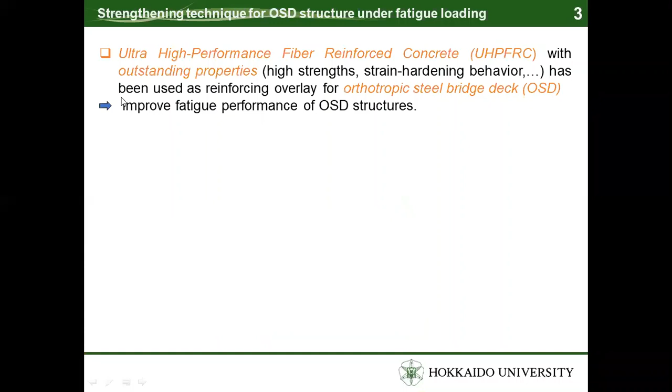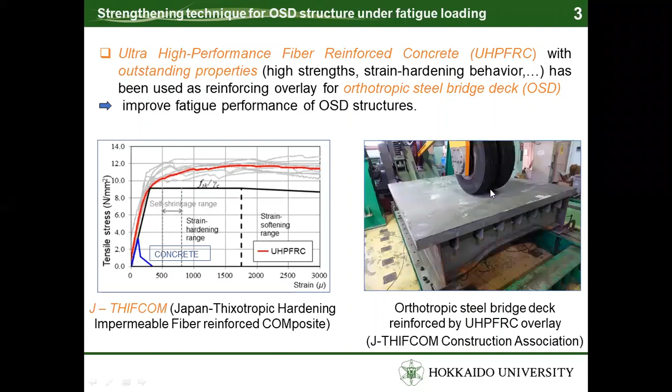Introduction: ultra-high performance fiber reinforced concrete (UHPFRC), with outstanding properties such as high strength and strain-hardening behavior, has been used as a reinforcing overlay for orthotropic steel bridge decks to improve the fatigue performance of this kind of structure.

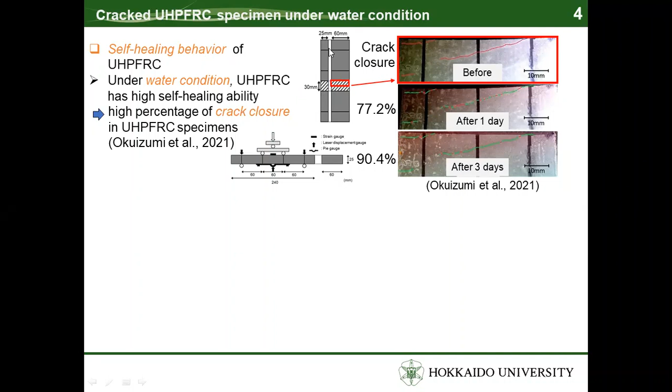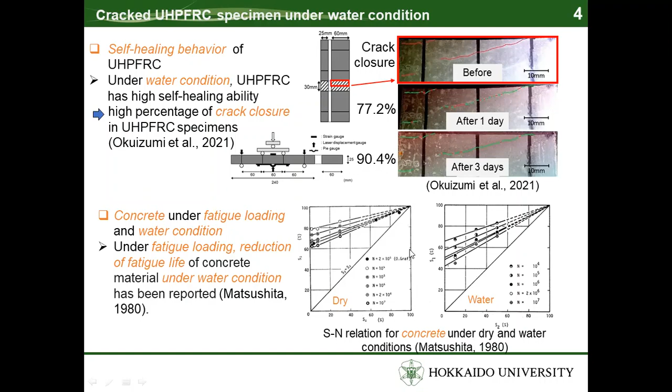The objective of this research is to develop analytical models based on the finite element method to investigate the fatigue behavior of UHPFRC-steel composite decks subjected to moving wheel loading under surface water conditions. The self-healing behavior and reductions of fatigue life are considered in the material model of cracked UHPFRC. The analysis will be verified with experiments from the J-THIFCOM Construction Association.

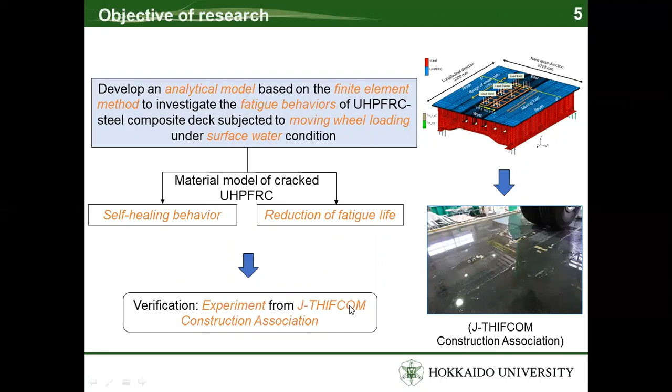Material model of UHPFRC. After the first stage under dry conditions, water has been supplied on the top surface of UHPFRC for one night before stage 2.

Assumed phases for the material model of UHPFRC: the first phase is the self-healing of cracked UHPFRC for one night under surface water conditions. The second phase is a higher degradation speed of cracked UHPFRC under combined action of fatigue wheel loading and surface water conditions.

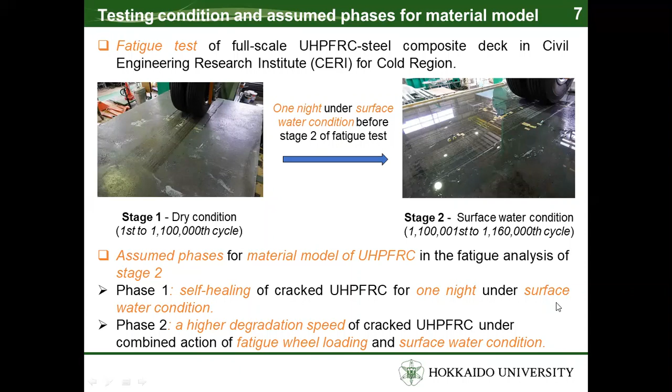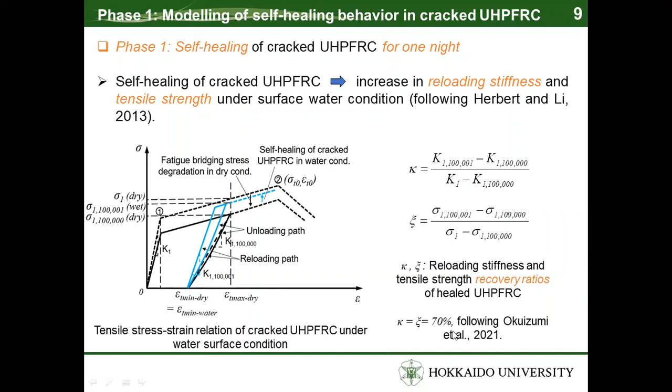In the first phase of the material model, the self-healing of cracked UHPFRC in terms of increasing reloading stiffness and tensile strength under surface water conditions is considered, and the recovery ratio is chosen as 70% in this analysis, following the results of Okuizumi et al.

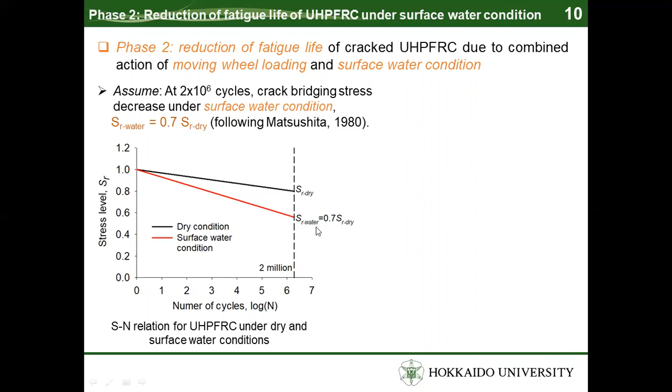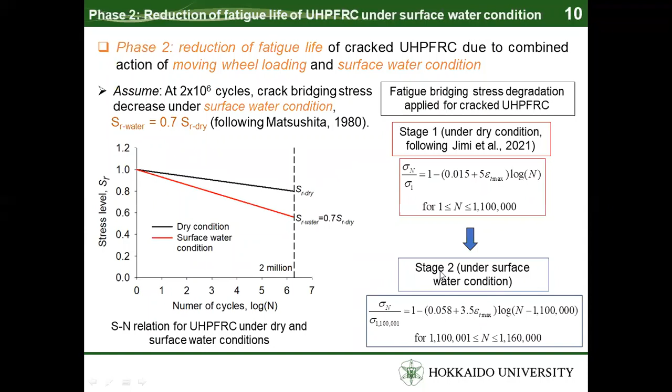For the second phase of the material model, it is assumed that at 2 million cycles, crack bridging stress decreases under surface water conditions, and the stress level in water conditions is chosen as 70% of that from dry conditions. The bridging stress degradation applied for cracked UHPFRC under surface water conditions in stage 2 can be calculated and is shown in these equations.

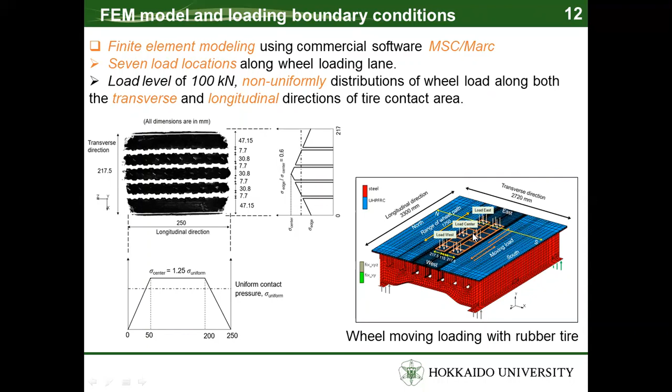Seven load locations are assigned along the wheel loading lane with a load level of 100 kN. The non-uniform distribution of wheel loads along the transverse and longitudinal directions is assigned for the tire contact area.

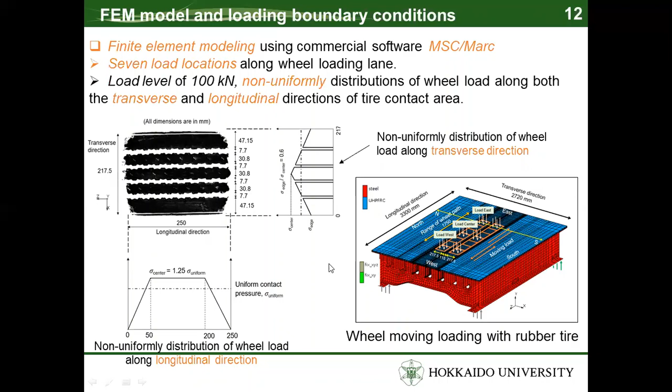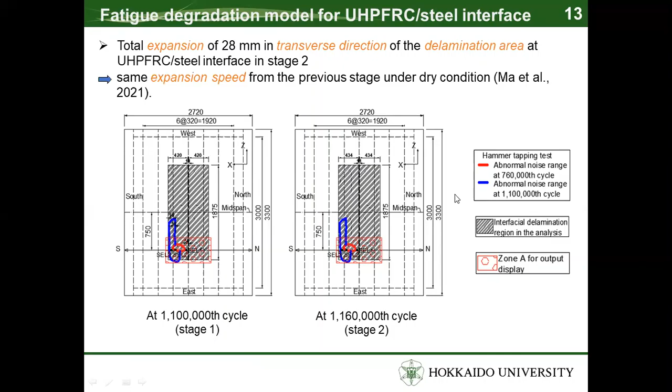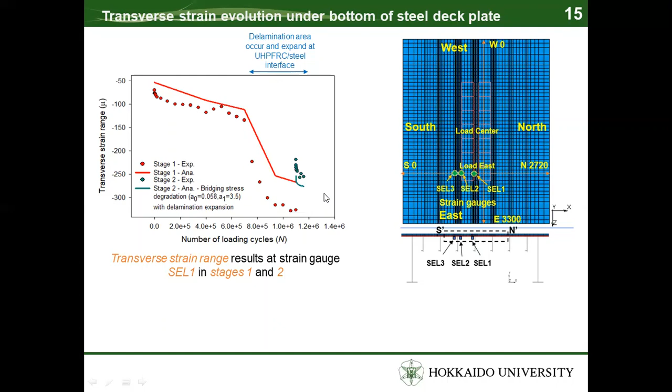After that, in stage 2, under surface water conditions, due to the recovery in reloading stiffness and tensile strength caused by the self-healing of cracked UHPFRC, a decrease in strain range level could be observed from the beginning of this stage. After that, under moving wheel loading, due to the fatigue life reductions of UHPFRC, an increase in transverse strain range level could be obtained.

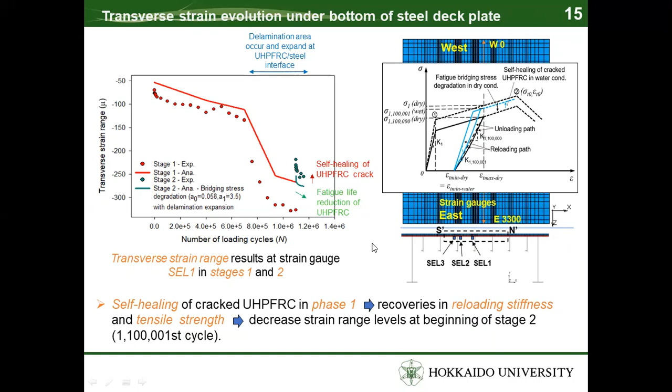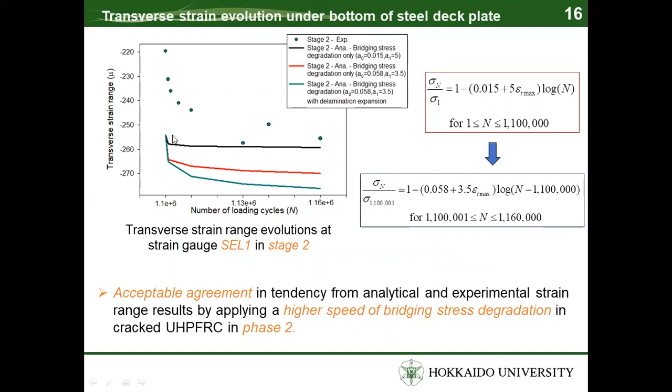In phase 2 of the material model, by applying a higher speed of bridging stress degradation in cracked UHPFRC, an acceptable agreement in tendency between the analytical and experimental strain range results could be obtained, especially for the early cycles of this stage.

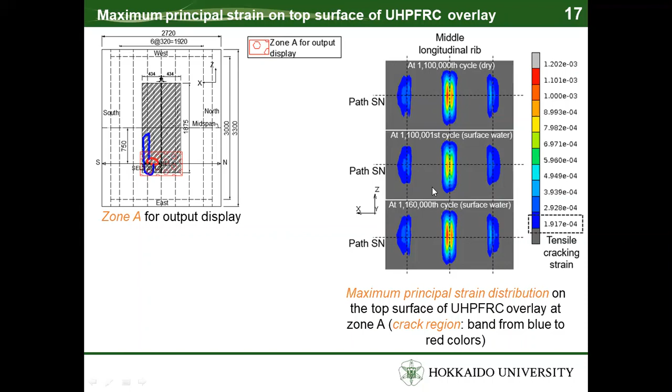This figure shows the maximum principal strain distribution on the top surface of the UHPFRC overlay, zone A. The results are represented by bands from blue to red color.

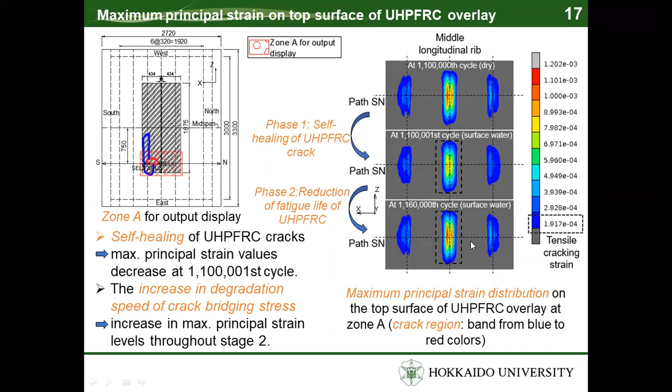In phase 1, due to the self-healing of UHPFRC cracks, the maximum principal strain value decreased at this cycle. After that, under moving wheel loading, due to the reductions of fatigue life of UHPFRC, an increase in maximum principal strain level could be obtained throughout stage 2, as shown in this figure.

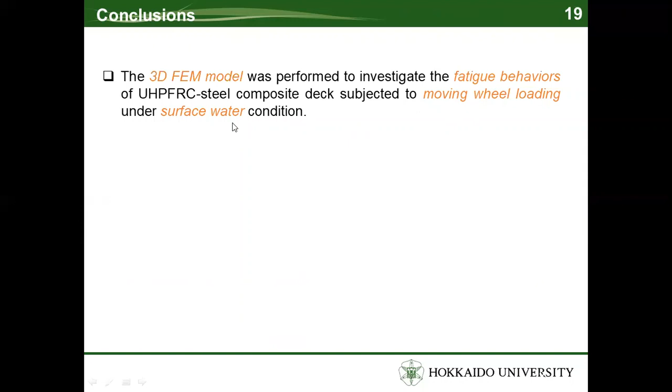These 3D FEM models were performed to investigate the fatigue behavior of UHPFRC-steel composite decks subjected to moving wheel loading under surface water conditions.

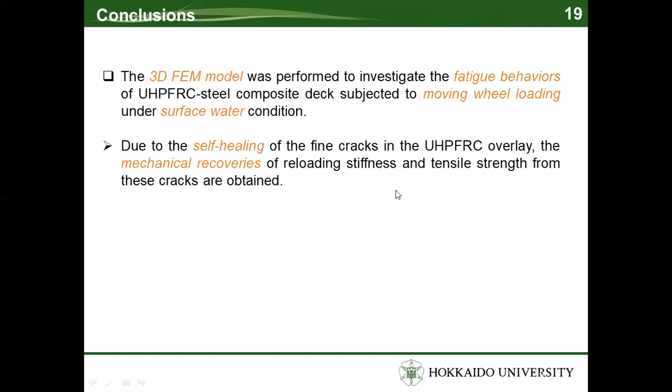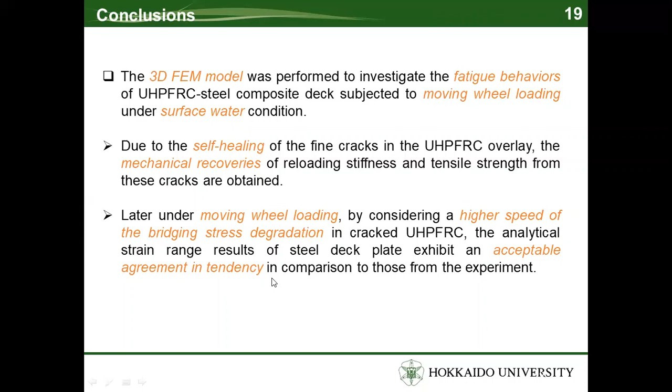Due to the self-healing of cracks in the UHPFRC overlay, mechanical recoveries of reloading stiffness and tensile strength from the cracks are obtained. Later, under moving wheel loading, by considering a higher speed of bridging stress degradation in cracked UHPFRC, the analytical strain range result of the steel deck plates exhibits an acceptable agreement in tendency in comparison to those from the experiment. This is the end of my presentation.